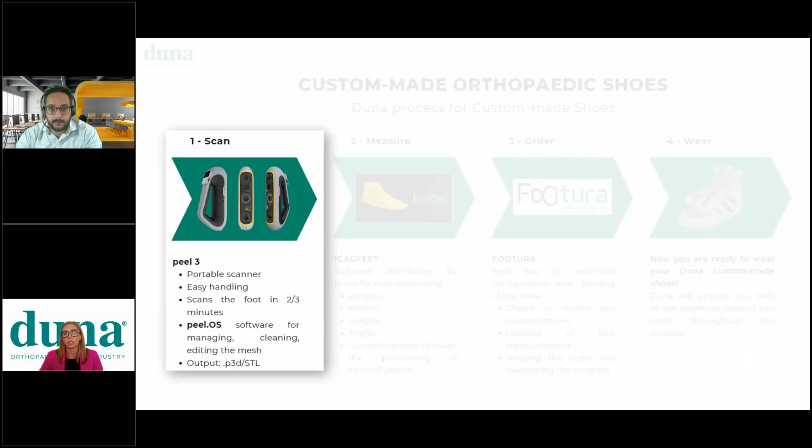Yes, so Duna's process for custom-made shoes starts with the scan of the foot using the peel 3 scanner, and the output generated by the scanner in STL format integrates with iCadFeet, which is a software developed together with our partner Inescop that allows us to recognize the foot volumetry and identify the foot measures. The key feature of iCadFeet is the possibility to place inclined planes whose intersection with the foot generates its fundamental circumferences, which are instead measured by hand in the traditional process.

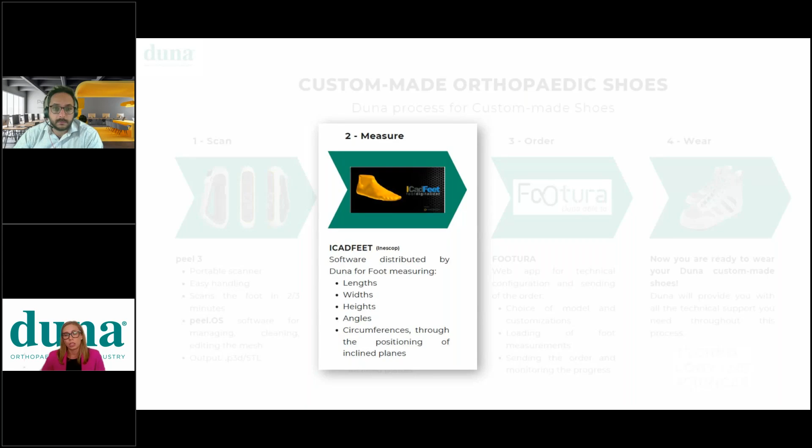This information is then imported into Footura, a web app developed by Duna, through which it is possible to configure the orthopedic shoes from both a technical and an aesthetic point of view. At last, Footura allows the technician to send the order to our facility, and Duna designs and manufactures the shoes. In this process, 3D scanning allows for the capture of the foot volumetry, which is particularly useful when designing the last on which the shoe will be built. Having the 3D reconstruction of the foot is critical, especially in pathological feet, and ensures a successful outcome with a perfect fit and no errors during the production phase.

On the other hand, peel.OS is relevant for scan post-processing, ensuring proper mesh cleaning and scan orientation, with the sole of the foot lying in the XY plane. This is especially important for the integration between the scan and the iCadFeet software. The process leading to the customization of orthopedic shoes is crucial for the well-being of the patient, both in prevention and treatment of certain foot conditions such as hallux valgus, plantar fasciitis, diabetes-related problems, or shoes that can accommodate braces. In this context, 3D scanning and the digital process save time and optimize the product without the need for adjustments or remakes after the first delivery to the patient.

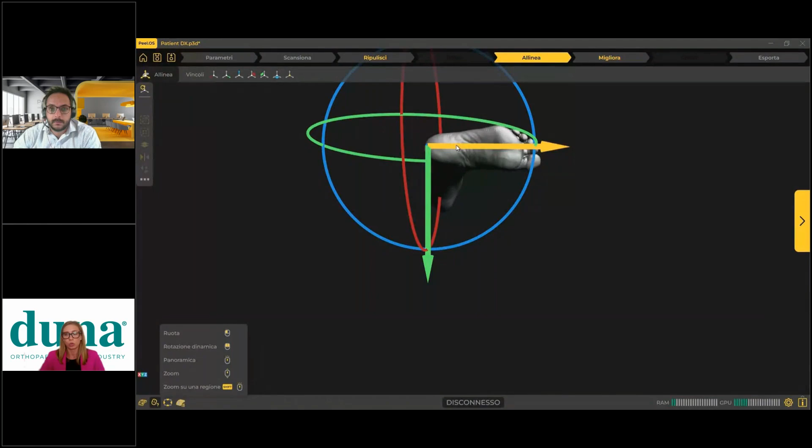So the first step is the 3D scan using peel 3. The ideal position for the patient is the one in which the angle between the sole of the foot and the leg is 90 degrees, and the operator should rotate around the patient's foot so as to acquire its full volume. After the scanning, peel.OS software gives the possibility to post-process the mesh, obtaining a well-oriented and cleaned scan.

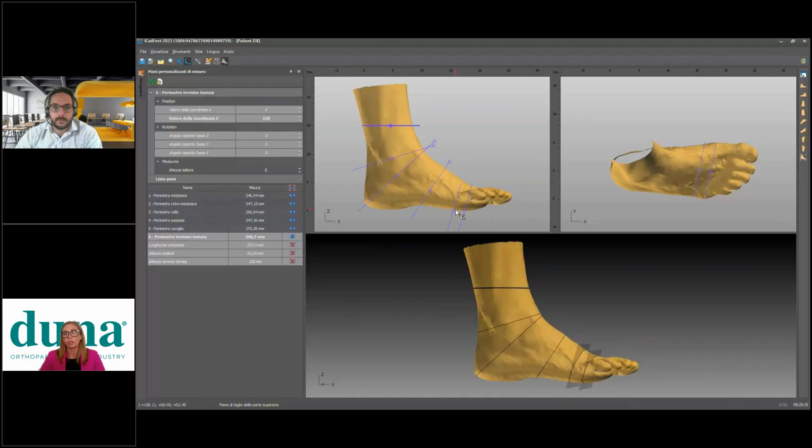And the STL file is exported from peel.OS and then imported into iCadFeet, which is the second step of this process. The main feature of iCadFeet stands in the positioning of inclined planes to have the 6 fundamental circumferences of the foot: ball, behind ball, instep, heel, ankle, and upper end. And all these planes can be oriented and placed at the discretion of the operator.

Then the third stage is the configuration of the orthopedic shoe. At first, a reference model is chosen from the catalog and imported, as we can see. And this model can be aesthetically customized in all its parts, such as upper, lining, closure, sole, and welt, and you can choose to leave the default setup or change some features.

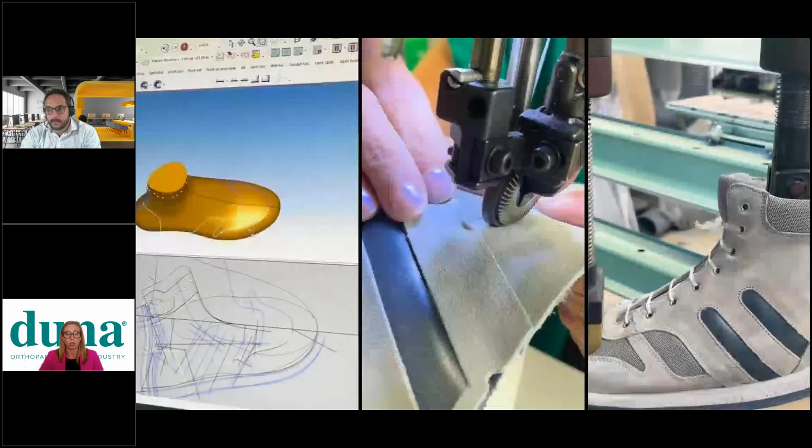Then you have to upload the patient measurements, and having the peel 3, when you upload the iCadFeet files, the measurements are automatically imported. At the end of the configuration, you can arrange all the technical details of the shoe, such as padding, stiffener, and so on. And at last, the order is sent to Duna, and the shoe passes through all the manufacturing stages until they are ready to be shipped and given to the patient.

Here we are in another process. The shoe customization is very important for the comfort and long-term health benefits for the patient. And there is a part of the shoes that's even more important than the shoe itself. It's the insoles. So Duna has also included the manufacturing of this essential part of the shoes in their manufacturing process. And Sarah will explain this process for us.

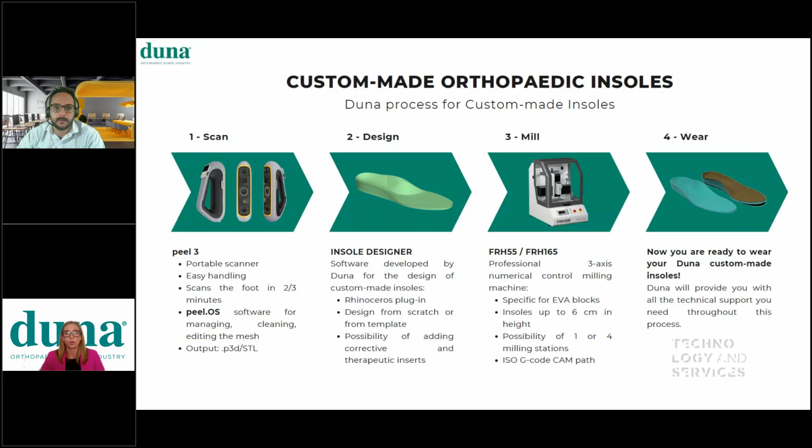Yes, as Marcio correctly said, insoles are a fundamental part of the orthopedic shoes, and along with it, they help to compensate or correct postural, biomechanical, or pathological behavior of the foot. In the same way as footwear, the process of manufacturing insoles also begins with the acquisition of the foot volumetry using the peel 3 scanner to scan the foot and peel.OS software for post-processing operations.

Then the clean, oriented scan is imported into Insole Designer, which is Duna's proprietary software that allows the CAD design of the insole following two design flows. The first one is a flow that starts from the scan of the foot, and it is totally customized to the patient, while the second flow starts from pre-designed templates. In both cases, modification and therapeutic correction can be applied. Here, once again, scanning of the foot is fundamental to achieve a product totally tailored to the patient.

And after designing the insoles, the CAM path is generated, and we move on to the milling phase, in which the FRH series machine works EVA blocks of different densities, sizes, and heights. And both single station and four station machines can be included in this process. In this context, Duna offers different alternatives in the custom-made orthopedic insole workflow.

So the digital insole production process can be differentiated in two ways. The first one involves the patient being taken care of by the orthopedic shop. The technician takes the measurement of the foot and sends Duna the scans of the patient and the technical specification of the desired insole. Then Duna designs and produces them. While the second process is entirely in charge of the orthopedic shop, whose technician takes care of scanning the patient's foot, designing the insoles and milling them. And the following video illustrates the process.

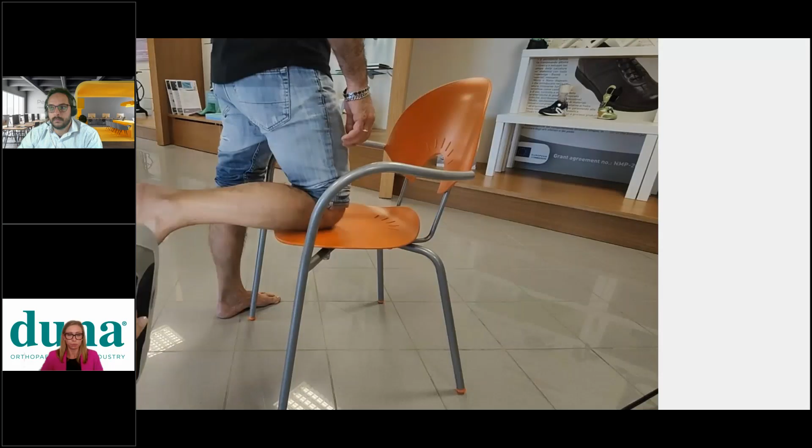So the first step is the 3D scan using peel 3, and basically using the same modalities that we have seen before. In this case, you can choose to scan the whole foot and part of the leg, or the sole of the foot and the lower part of the foot. After the scanning, peel.OS software is used for post-processing operation and allows to obtain a well-oriented and clean scan.

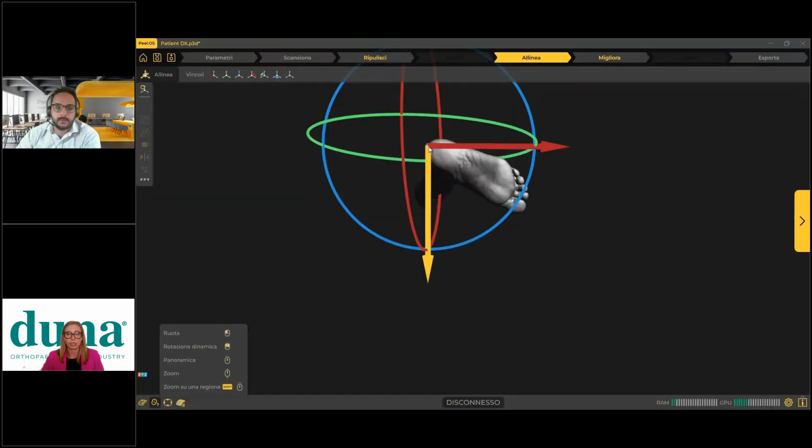Now the STL file is exported from peel.OS and imported into Insole Designer, which represents the second phase of the process. Insole Designer is a plugin of Rhinoceros, and in this video we will see the workflow for a full tailored insole for the patient. In this process, the foot and the last are superimposed, and the medial and lateral profile curves of the insole are drawn. And in this case, rulers are used to adjust the height of the insole.

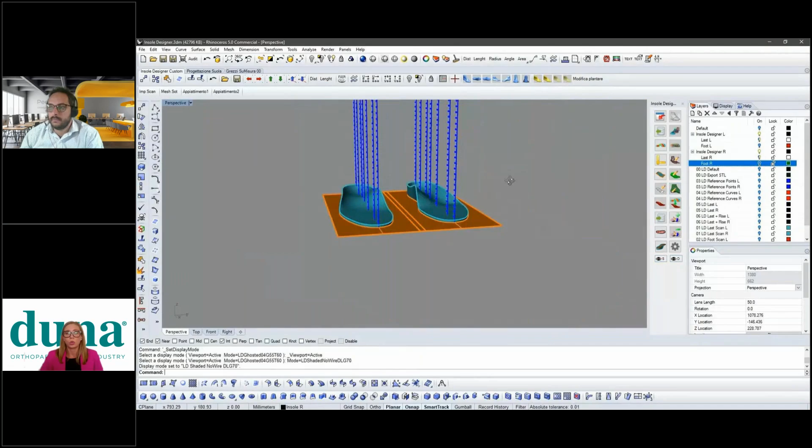Then the lower surface of the foot is used to reconstruct the upper surface of the insole. And Duna Insole Designer also offers a wide range of therapeutic corrections that can be applied to the insole, such as arch support, pronation and supination, circular offloads, and metatarsal bars. In this case, we see in the video the arch support and the pronation and supination.

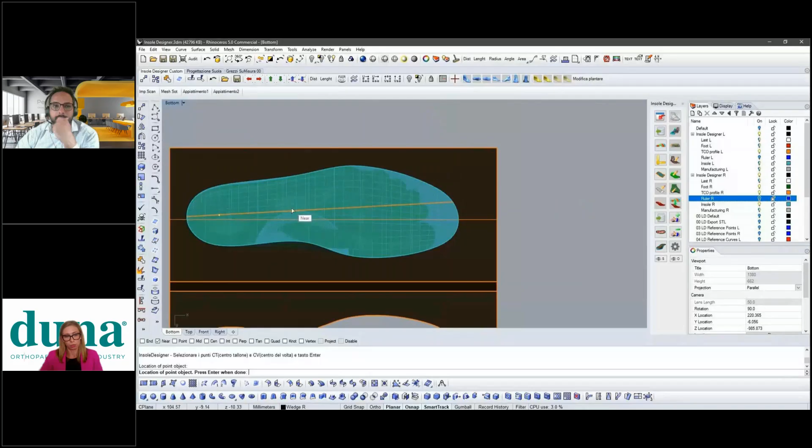The last phase of production consists in milling and finishing. Our milling machine is able to perform both single milling and double milling, giving the possibility to mill insoles with heel spring or pronation and supination. Finally, the insole can be covered and finished and inserted into the footwear so that a perfect match between the foot, the insole, and the shoe will be achieved. This is the case of custom-made insoles inserted inside a custom-made shoe. And as you can see, the match is perfect.